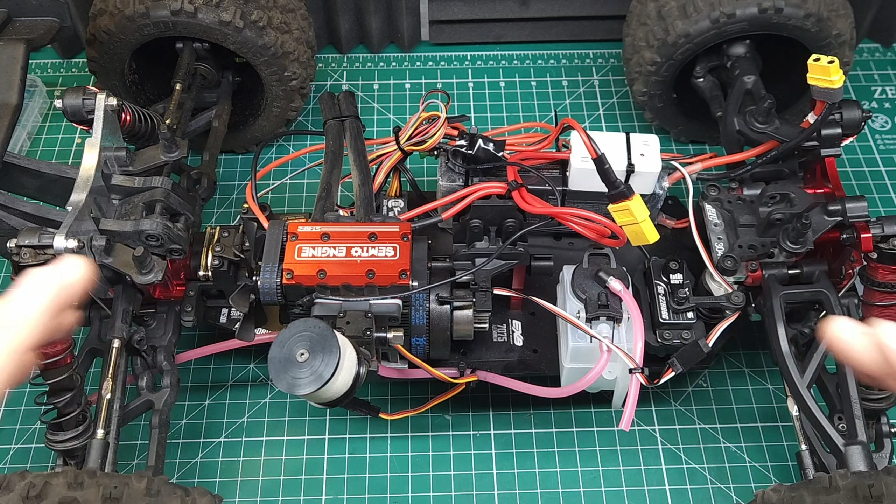In our last video, we engine swapped this Kraton EXB, and while this thing looks absolutely awesome, I think you'll agree the performance of this engine in this particular truck was just a little bit tame. Today, we're gonna make some modifications to this engine that hopefully spice it up, and if that doesn't work, we've got something really spicy to put in.

The last thing we did in the previous video was convert this from nitro to gas. We're gonna be pulling all of this back out of here and converting it back over to glow plug ignition, but first, I'm actually really curious to see how the spark ignition works with nitro fuel. I've read online that this does technically work, and I'm really curious to see what the results are, so let's see what happens. Then when we come back, we're gonna tear this engine apart and fix a few of the deficiencies I found when we built it.

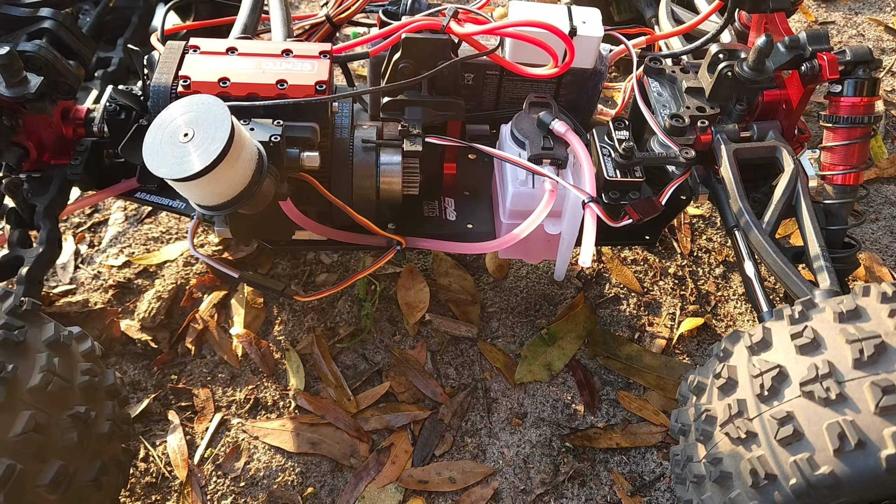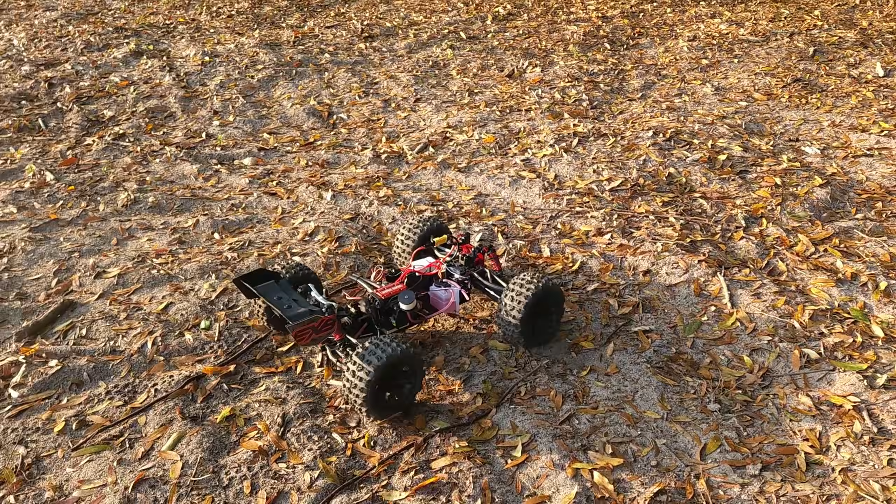All right, she's full of nitro fuel. Let's see what it does. Well, it started awfully easy. Does it run okay? That does actually seem to run better than on the glow plug. It's not any faster though. It definitely is running, that's pretty cool. I'd say it has a lot less power than on the glow plugs though.

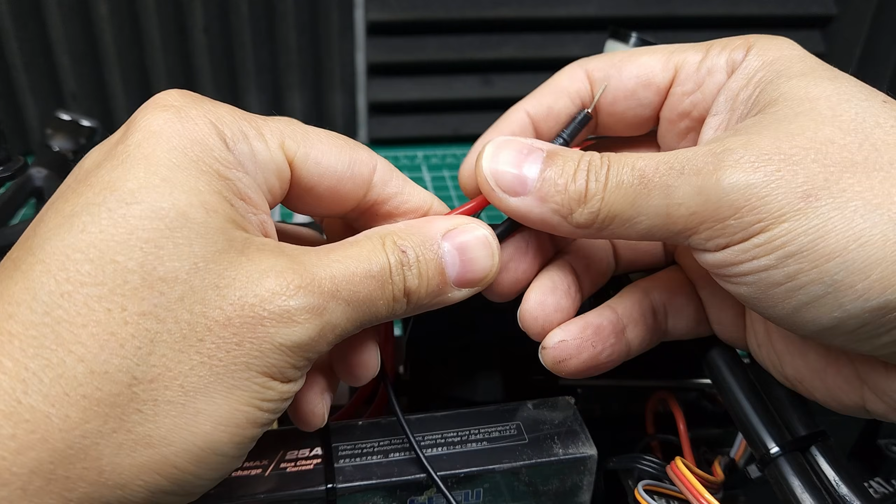What exactly do I mean by that? What's the difference between spark ignition and glow ignition? In any engine, there needs to be a source of ignition in order to turn the potential energy in the fuel into kinetic energy that actually drives whatever you're trying to move. Most gasoline engines use what's known as a spark ignition, where they have a high voltage pulse going through wires through a spark plug, which has a small gap in the end, and that spark is what actually ignites the fuel-air mixture. Most small RC model engines use what are known as glow plugs, and instead of having a spark, you have this filament that stays hot and glows, and that's what ignites the fuel-air mixture.

This is actually a really interesting system. That little wire has a platinum coating on it, and that platinum coating actually catalytically reacts with the methanol in the nitromethane fuel. And unlike the spark of a spark plug, it's that glowing coil that actually lights the fuel off on each combustion cycle. The main benefit to a glow plug system is simplicity. Unlike with a spark-based ignition where you need some kind of high-energy discharge system, a sensor to tell the engine when to actually fire that system, and a bunch of other supporting parts, with a glow plug ignition you pretty much just need the glow plug and then the fuel to actually keep the glow plug glowing.

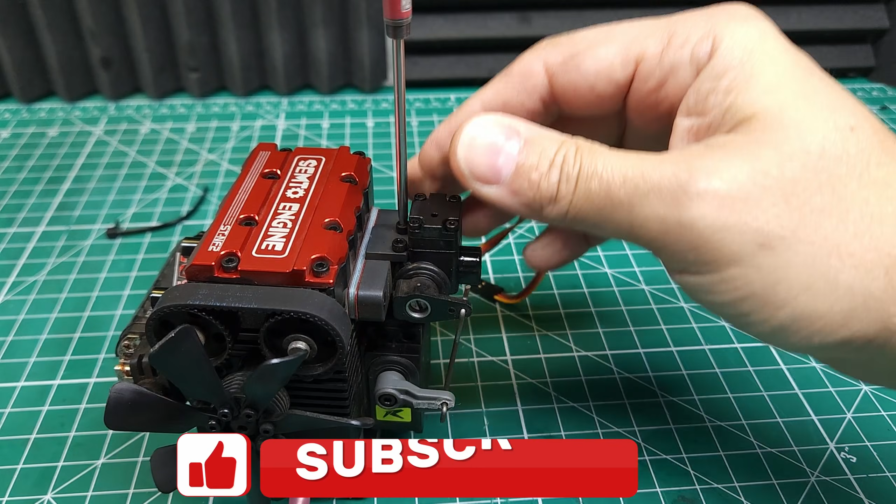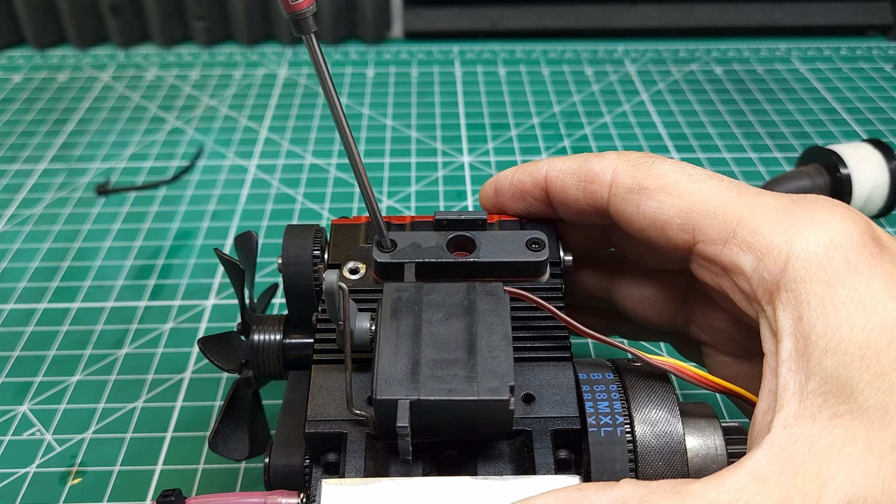The main reason we're going to be switching back from gasoline to nitro fuel is that nitro fuel has the ability to produce a lot more power than gasoline does. This isn't because nitro fuel is more energy dense than gasoline. As a matter of fact, gasoline is a little bit more energy dense by weight than nitromethane is. The main advantage nitromethane has is the ability for it to run a lot more fuel for a given amount of air. The perfect air ratio for gasoline is about 14 parts of air to 1 part of gasoline, and the perfect ratio of nitromethane fuel is about 2 parts air, which makes a huge difference in how much actual fuel you can shove into the engine.

Speaking of shoving fuel into the engine, I think one of the big problems we have is the restriction of this intake manifold. The carburetor lets fuel and air in here. It has to run down to these holes and then into the engine. I think we can make a big improvement here by simply cutting the middle of this spacer and this gasket out. Let me do that and I'll show you what I mean.

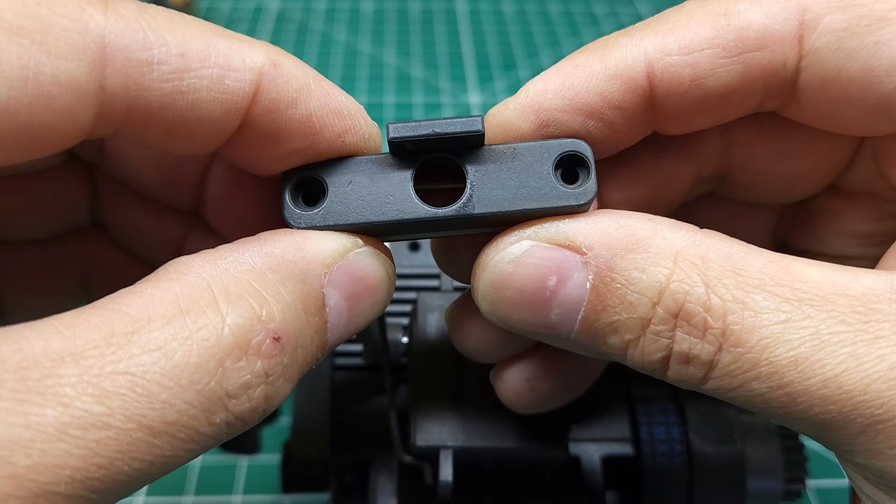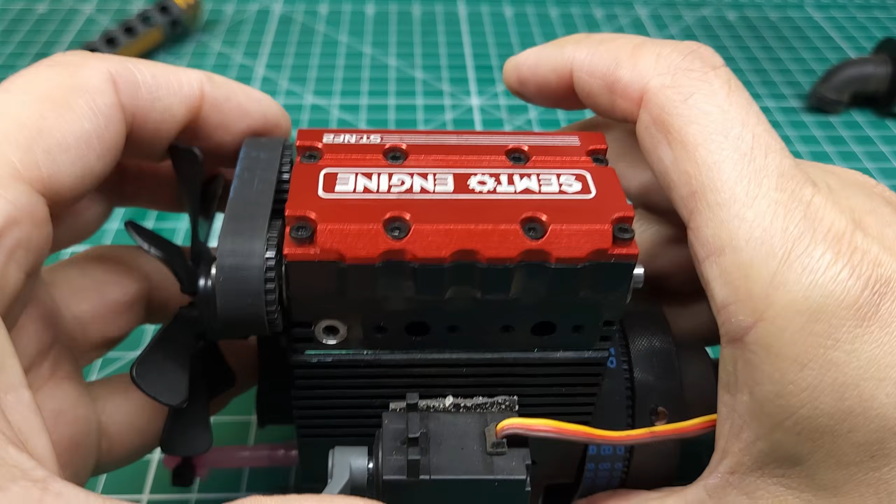As you can see, with that small modification, the actual manifold part of this intake is going to be quite a bit larger, and that should allow a lot more airflow, and I think that's going to give us more power, especially on the top end, but we've got a few other things we can try to hopefully make that even better. I noticed when I was originally building this engine that those valves I showed you didn't really seal that well, and I think if we make that valve interface a little bit better, we can get better compression, which again, should give us more power.

Pulling the engine apart is also going to give us the opportunity to inspect everything and make sure nothing has broken or come loose. Everything in here looks pretty good. As you can see, the top end of the engine is actually lubricated by grease. The bottom end of the engine is lubricated by oil in the fuel, and I think that's another place where we're going to be losing some power. I'll talk about that in just a minute though.

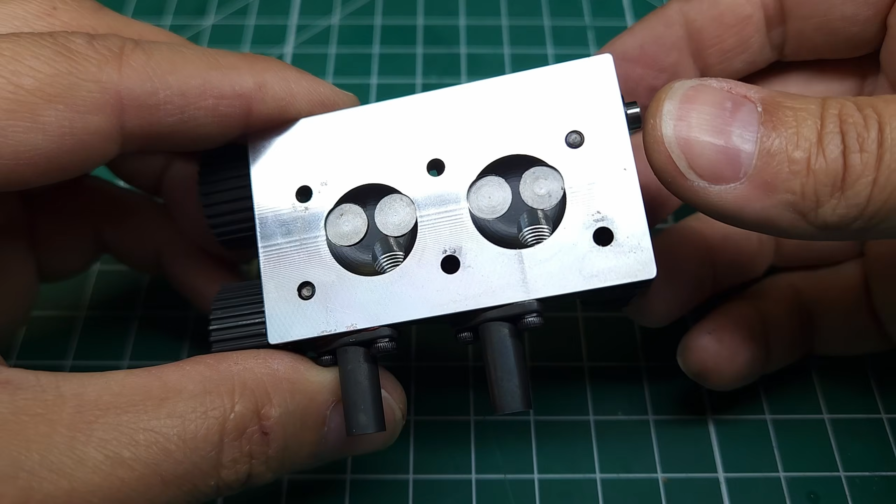In most typical four-stroke engines, valves open and close to allow fresh air and fuel in and combustion gases out. I noticed when I was putting this together that these valves don't seal very well, and I'm hoping that making them seal better will give us higher compression and therefore more power.

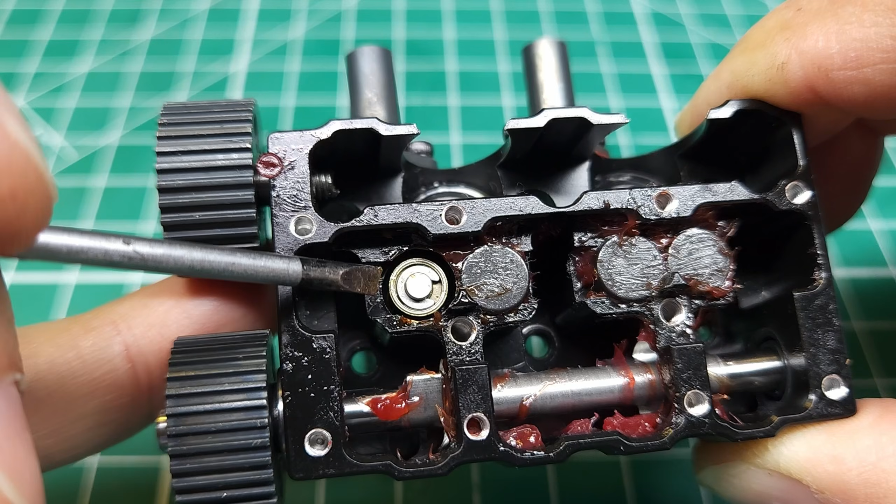Of course, since everything in here is lubricated with grease, everything's super greasy, so we're gonna have to wipe a bunch of this off, but I do think this is gonna be worthwhile, as any combustion gases that leak out not only reduce power, but they also cause problems, especially if you've got combustion gases pushing out of the intake manifold. That can cause all kinds of weird problems. These valves are held in with little circlips, and there are actually springs underneath them. I'm gonna remove this off camera so I don't lose anything.

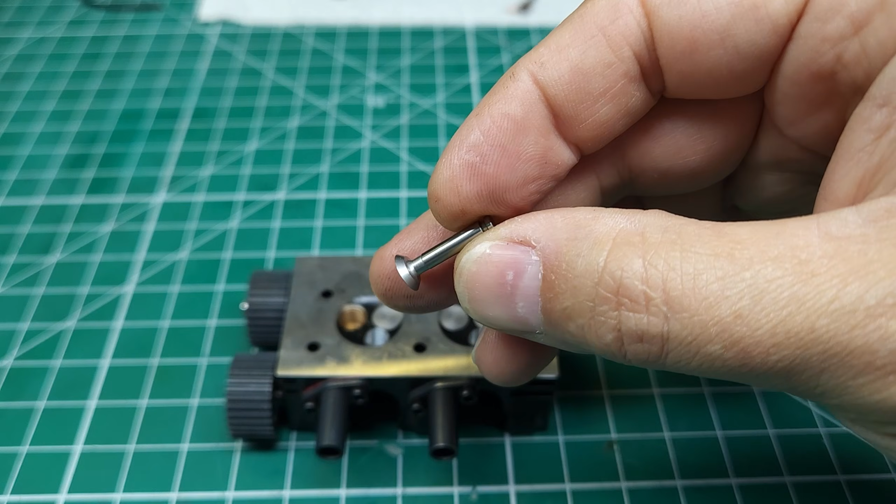Now with that removed, you can see the teeny tiny valve that actually controls inlet and outlet into the combustion chamber. And to lap these valves in, I'm actually going to use toothpaste. Surprisingly, toothpaste does have some abrasive in it, and for something as soft as this brass, it should work just fine. All I'm going to do is put just a little bit of toothpaste on the valve itself, stick it back in the head, nice and minty fresh.

Then I'm going to put a piece of fuel tube on the back. That's going to allow me to spin the valve while pulling on it, and I'm going to keep doing that until we get a really nice mating surface between it and the valve seat. There we go, guys. That actually looks really nice. Now, you obviously wouldn't be able to use toothpaste on a full-size engine because the valve seats are going to be a lot harder, but on something like this, it should be fine.

And again, I'm hoping that's going to give us just a bit more power out of this engine. I'm going to go ahead and get the rest of these done, get all this cleaned up, put fresh grease in it, put it back together, and let's go find out. Okay, guys, we've got more air going in. We've got more air staying in. Can we make more air come out? The answer to that is absolutely, but I'm probably not going to.

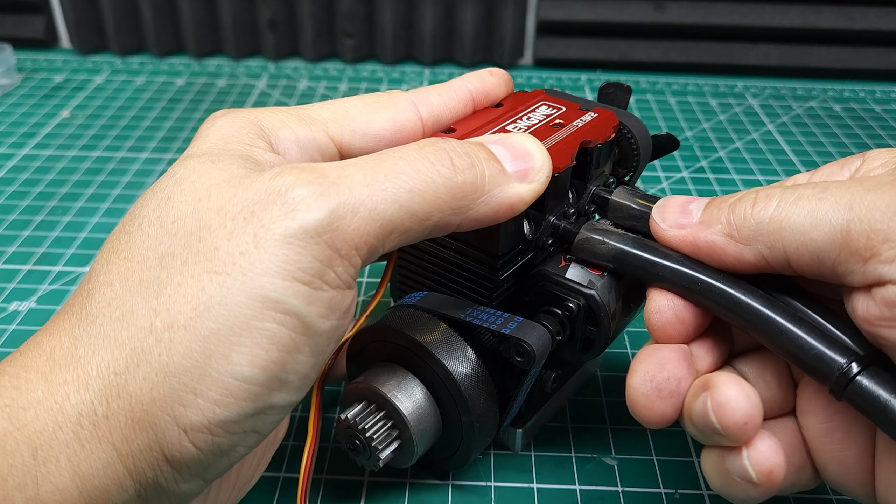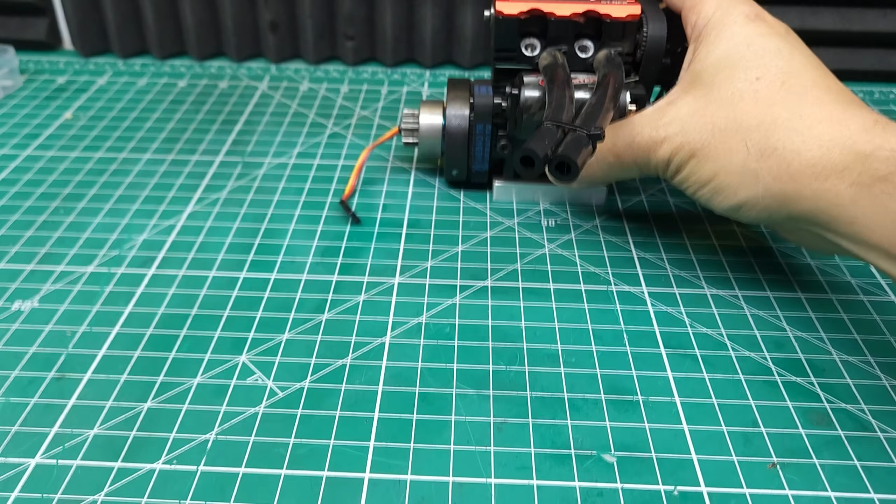I don't think it would make a big difference, but what we could do is make a 2-to-1 exhaust system. And essentially with that, the exhaust pulse from one cylinder will help draw out the exhaust pulse from the other cylinder. In a pretty inefficient engine like this, I really don't think it would make a huge difference, so it's not something I'm going to mess with right now. But if this thing runs great now and we just need a tiny bit more power, it's definitely something we can look at. Of course, if it doesn't and we need a lot more power, we're going to be looking at this.

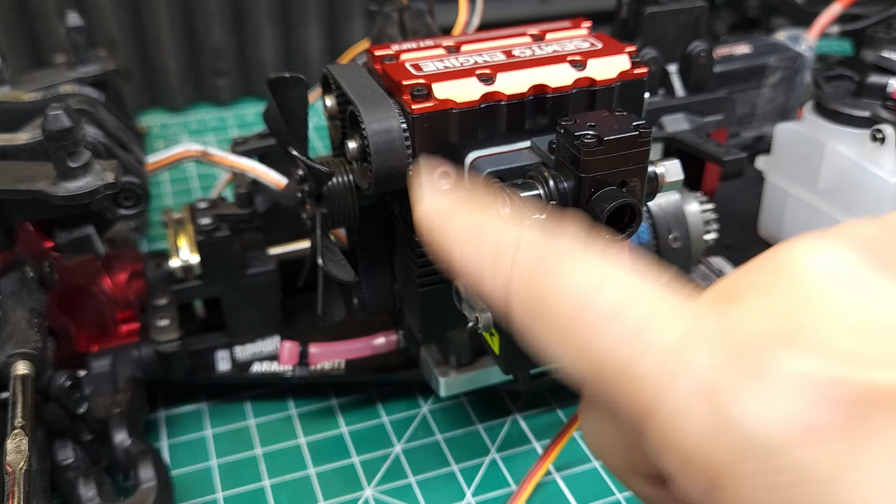One of the reasons I think we see a big loss of efficiency is the design of the lower lubricating system. The design of this engine means it depends on oil from the fuel to lubricate everything in the bottom end, which means by design, this thing relies on compression blow-by, and compression blow-by means less power. Unfortunately, there's nothing we can do about that because the bottom end does need to be lubricated. Now, speaking of power, let's go ahead and get this thing filled up with fuel and see if we can make any more.

Yeah, I actually think they did. This thing sounds meaner, and it's actually got more power. I'm kind of surprised. I didn't think it was going to make much difference. Of course, it's still not super powerful, but it's definitely more powerful than it was. I'm very impressed. Yeah, it's definitely running better, and the exhaust sounds so much louder than it did before.

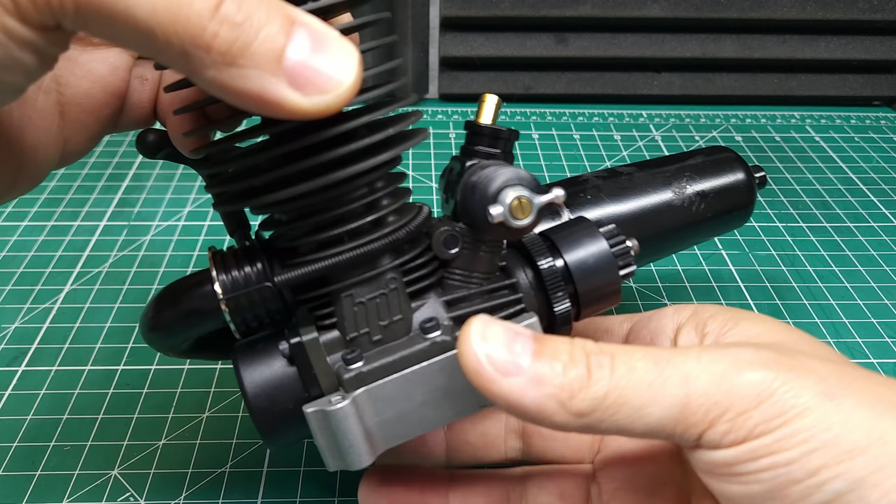Obviously, this is not the performance we're looking for, though, so let's find that performance. And for that performance, we're going to turn to this HPI F4.6 Nitro 2-stroke engine. This thing's actually a little bit smaller displacement than the engine we had in the truck, but this is a 2-stroke engine, which means we're going to get double the combustion events, and this thing is specifically designed to power a big, heavy RC car. I think we're going to get some good performance out of this thing.

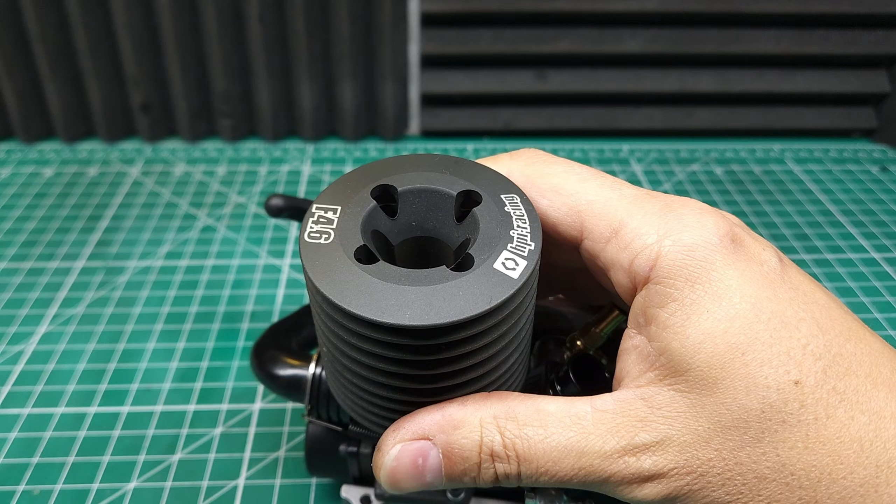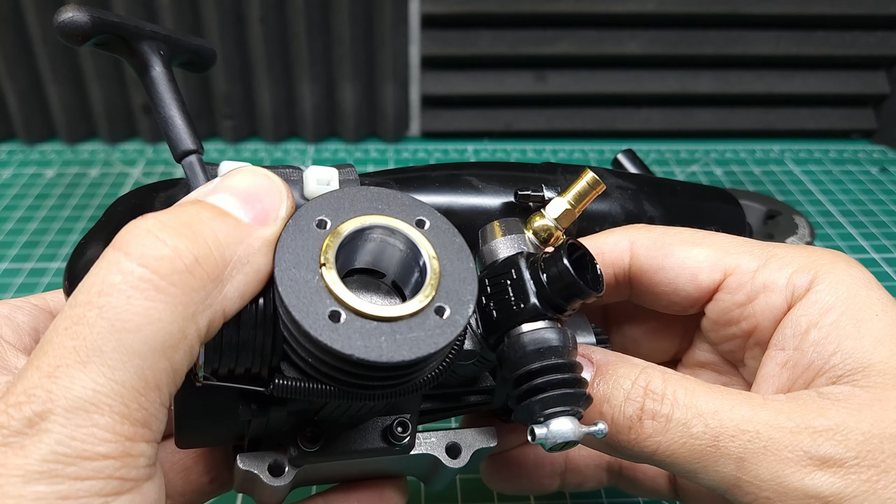The way most 2-stroke engines work is pretty fundamentally different from how a 4-stroke engine works. Let me get this cylinder head taken off, and I'll show you what the differences are. Now, as you can see here, there are no valves on the cylinder head, and there are no real valves at all in this engine. Instead, if you look down there, you can see there's a set of ports on both sides, and those ports are covered and uncovered by the piston, and that's what lets fresh air in and exhaust out. On a 2-stroke engine, the intake and compression cycles and the combustion and exhaust cycles are actually combined, which is why you can get a combustion event every single time the piston goes up.

Unlike most 4-stroke engines, these small 2-stroke engines also don't have a piston ring that seals the piston against the cylinder. The cylinder actually tapers up here at the top, and you can see the piston pushes against it and actually pushes it out at the top. That's because this engine's brand new, which means we're gonna have to break this in, but first we need to get it in the truck.

I'm hoping if we flip this exhaust around, we can put it where the other engine was so we can use the same slots I already made in the chassis in the previous video. In order to do that, we're gonna have to be able to use this motor mount. Let me go ahead and take some measurements off this new engine. We'll go ahead and put those into CAD and see just exactly what we'll have to do to the original motor mount in order to make it work.

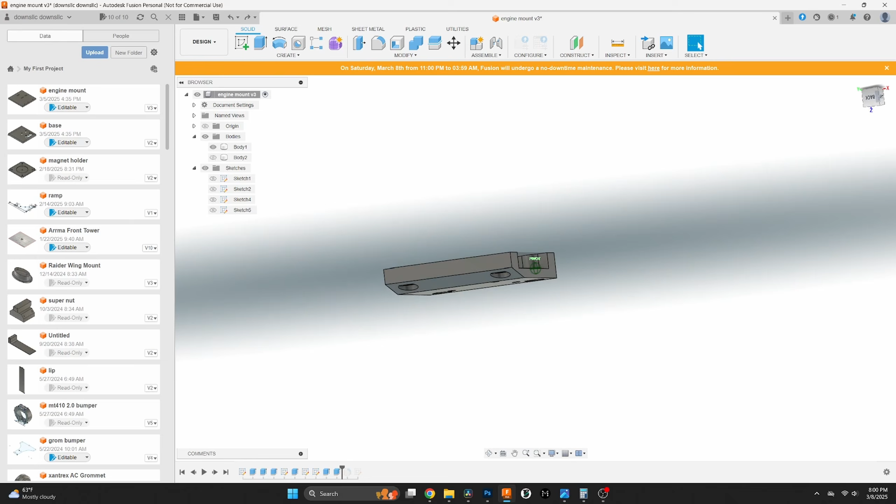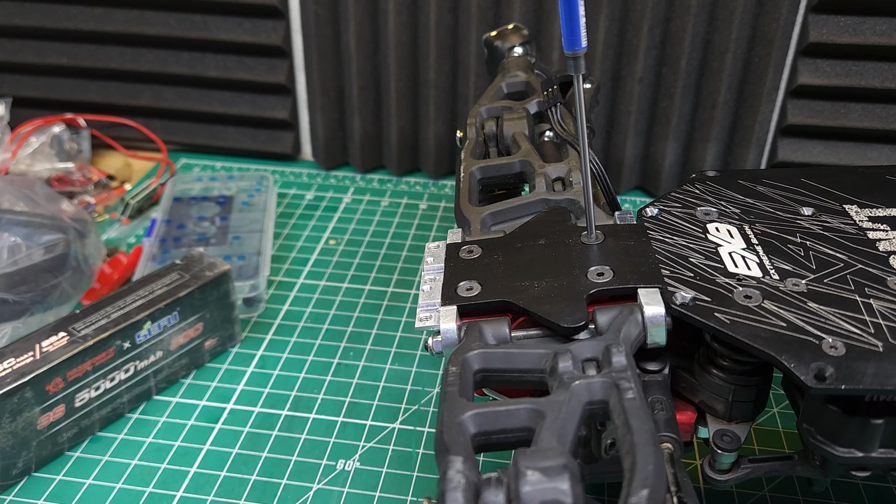And as you can see here, we'd have to cut a big notch in the mount, which I don't think is a great idea, as it's going to make it pretty weak and our screws are going to have to be really short. So unfortunately, I don't think mounting it on this side is going to work, which means we're going to have to mount it over here, which means we got to strip this whole thing back down again. And now with all that stripped down, let's see if this thing's even gonna fit. It does look like it should mesh up with the center differential, and I think there's even gonna be clearance for the rear drive shaft, so yeah, I think we're in business.

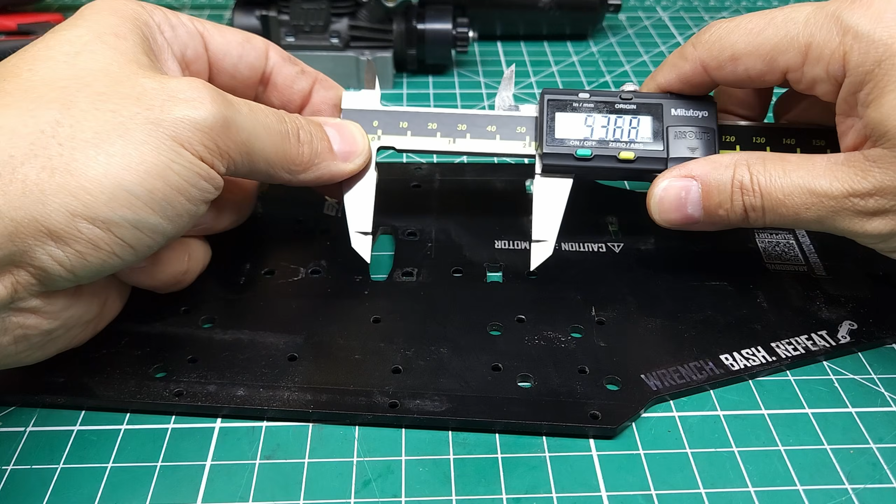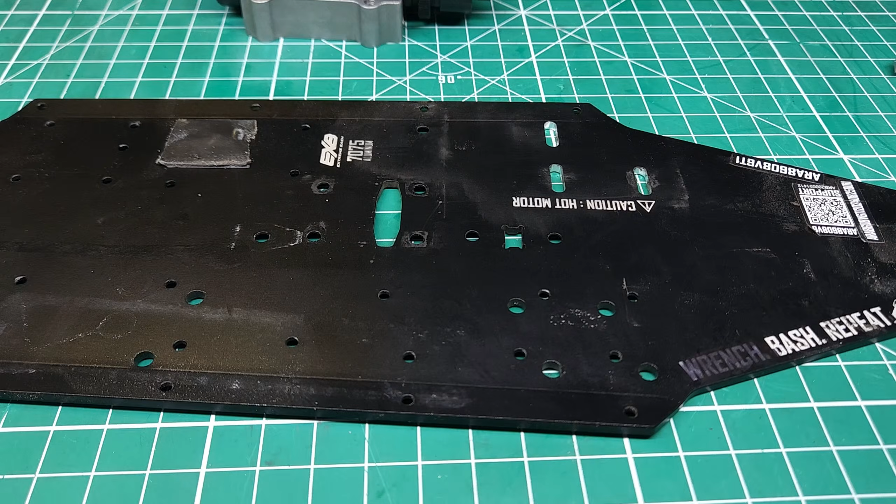Again, we just need to take some measurements on this chassis, and then using the measurements I've already taken on the motor mount, go into CAD, take our model of the chassis, add the holes in where they're supposed to be, make those into slots, and then we can switch our Snapmaker Artisan over to laser cutting mode, cut this out in paper, and about 10 seconds later, we can actually test and see how it's gonna fit.

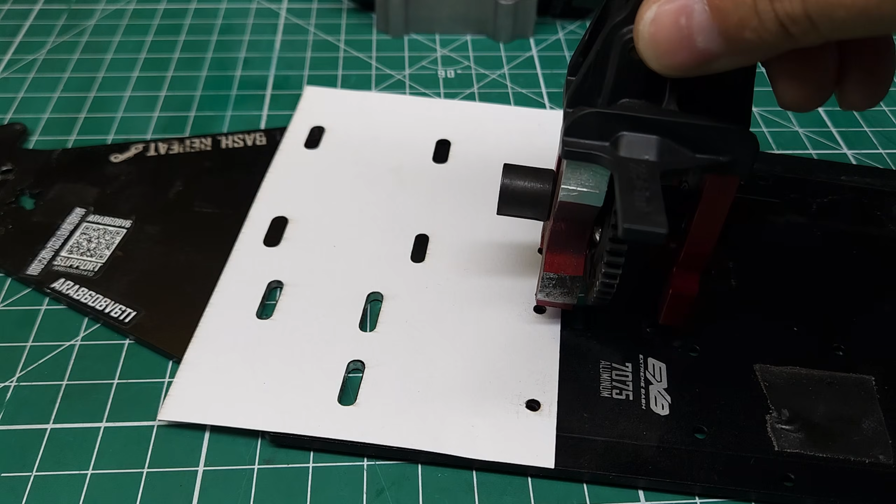This is where our new slots will go, and fitting the motor over the top, it looks like it's going to be pretty close, though I think I need to scooch these slots over a little bit. So let me fix that in CAD, cut it out again, and we've got a paper template one more time. I'm telling you guys, that's the beauty of this laser cutter. You can iterate in prototyping so quickly. Putting this on here and dropping our center differential on, and then our motor. It looks like all this stuff's going to line up just about perfectly.

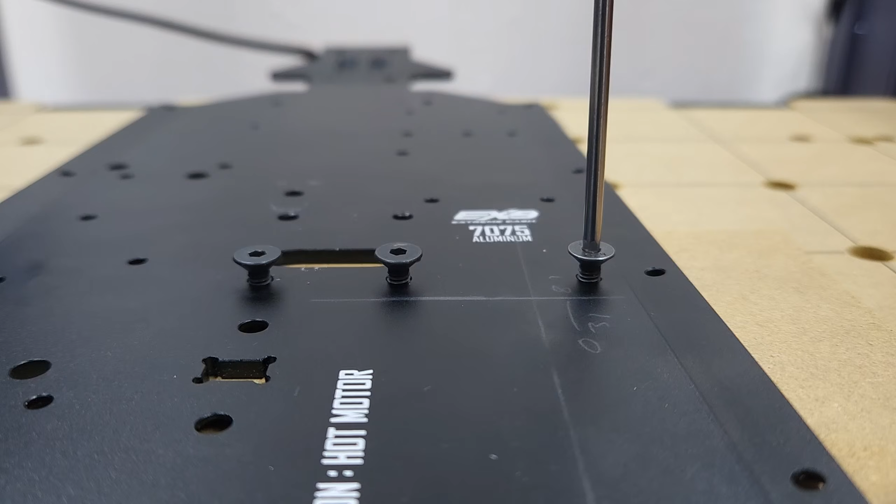And because there aren't very many square frames of reference on this chassis, we're going to use the exact same trick we did last time, where we're going to drill 3 holes that match the holes for the motor mount. Then we're going to screw the chassis down onto those holes which align it, and then we're going to go ahead and cut our slots. This chassis is starting to look like Swiss cheese, but these holes came out really, really well, and they're exactly where I wanted them to be.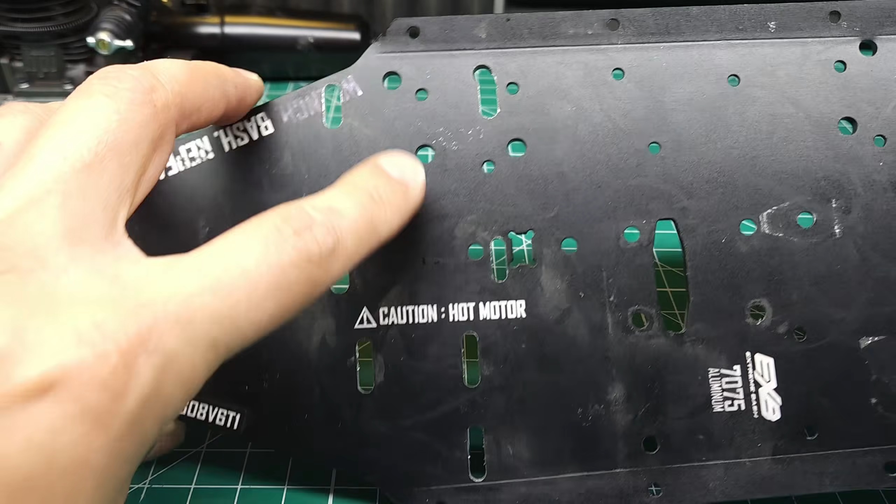Kind of had to thread the needle here. I'm actually going to use a smaller screw and put a nut on the other side here, because if I'd made the slot the same size as these, it would have ended up either in this hole or in here. But now let's get this center differential on here and see if it actually fits.

Not only does it fit, but those gears line up absolutely perfectly. Guys, I think this is actually gonna work. Let me get the throttle servo installed and do some wiring, and I'll show you what it looks like.

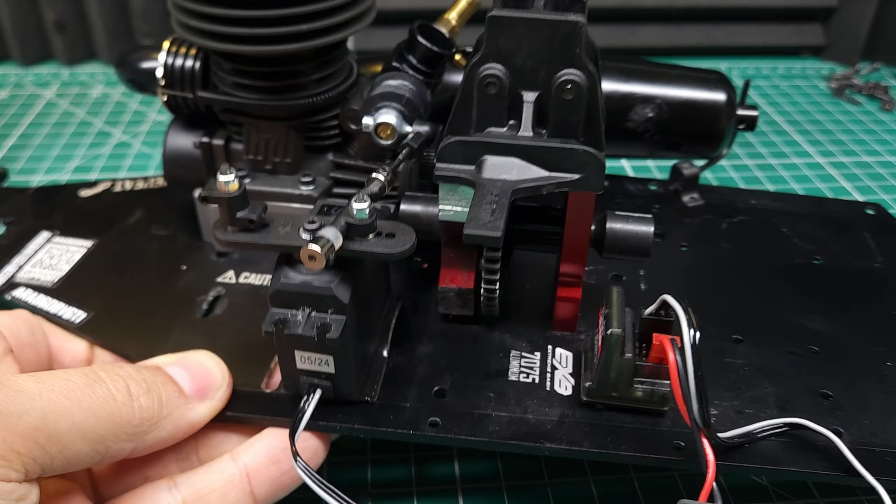Now, you might laugh at the fact that I double-side taped this throttle servo to the chassis, but they didn't call this kind of tape servo tape for nothing back in the day. A lot of servos used to be taped onto chassis, and especially for something like a throttle servo where there isn't really a lot of stress on it, this is gonna hold up just fine.

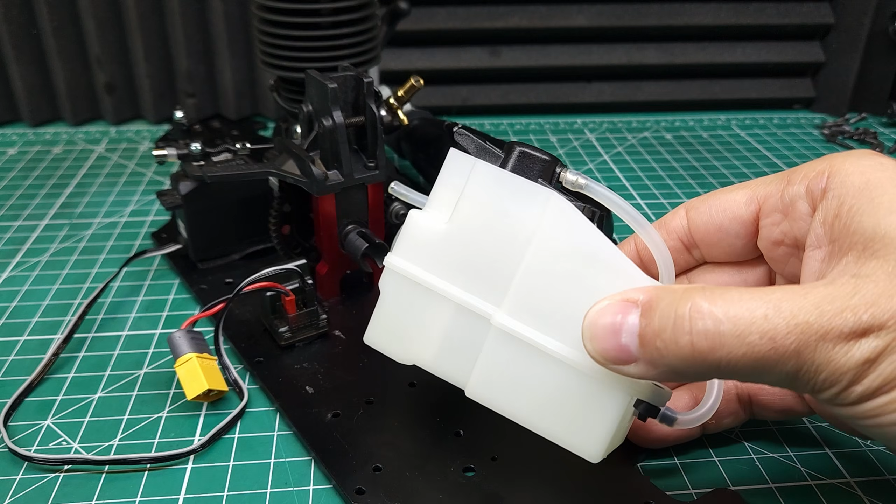I've also installed and wired up my receiver, and if we plug this in, you can see we've got throttle control now. Of course, controlling the fueling only works if we have fuel, and I think I'm going to use this fuel tank. The tank we were using before was really small, and I don't think we're going to get much runtime out of it. I think this will fit right here, and yeah, that should clear the front drive shaft.

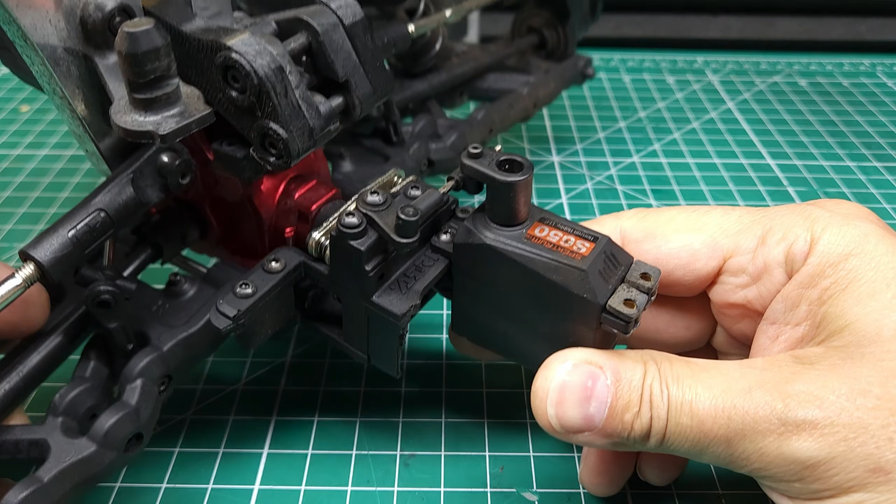Now we just need to get the front and rear ends installed, and looks like we've got a clearance problem. In the previous video, I had to customize the mount for this rear brake servo because the engine was over here. Well, now the engine's over here, and it's in the way again. Unfortunately, I cut the mount off this side, so we're going to have to move this a different way.

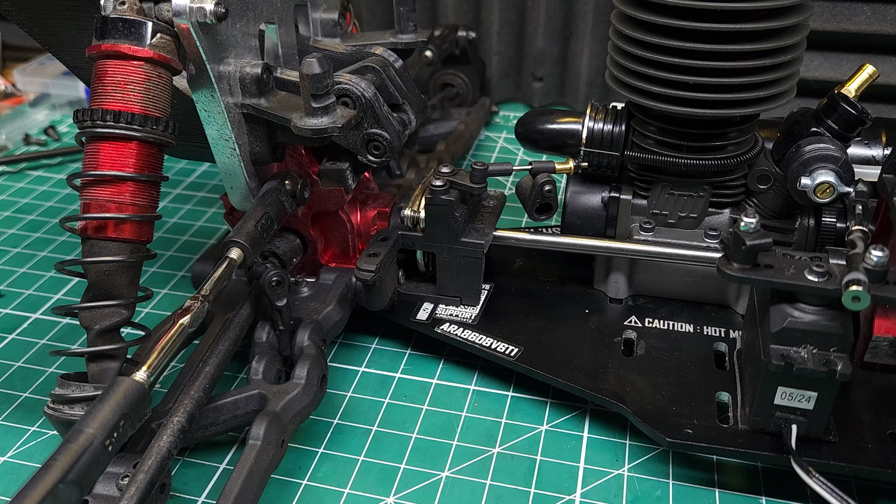If you've never seen one of these before, it's a mechanical brake. When you engage the servo, it squeezes these 2 pads together and stops this rotor from spinning. The rotor is attached to the input, and that's what's going to give us our brakes. Well, fortunately, even though I did cut that bracket off, these 2 screw holes are still here. I think it's going to be plenty to hold this servo in, and that's going to clear everything just fine.

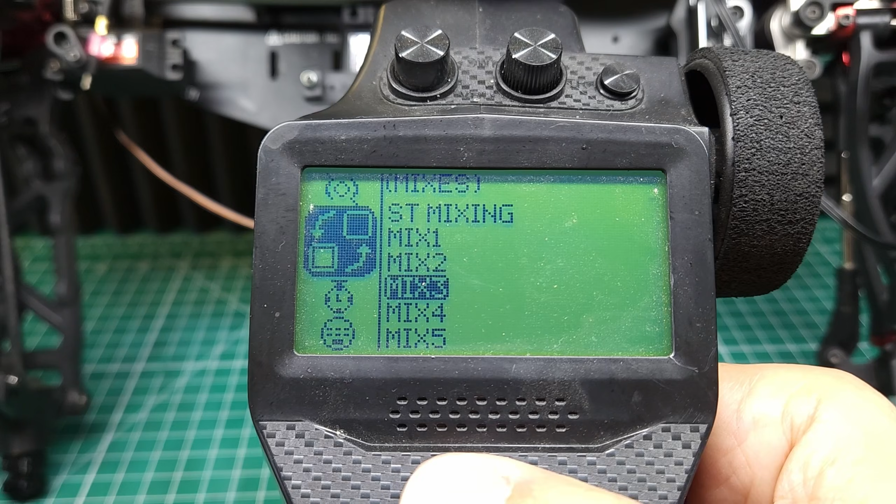All right, now we have throttle on one servo and brakes on the other servo. Some of you were wondering how I set this up, and on the G7P, it's fairly straightforward. Basically, I just set up a couple of mixes to where on channel 3, when I give it throttle, nothing happens, but when I give it brake, it activates that channel. You can see the M and S down here at the bottom. I'm getting the brake right now, and it's activating that channel. I'm hitting the throttle, and it's not doing anything.

But then on mix 2, I have it set up to where if I give it throttle, I get that out on channel 4, but if I hit brake, nothing happens.

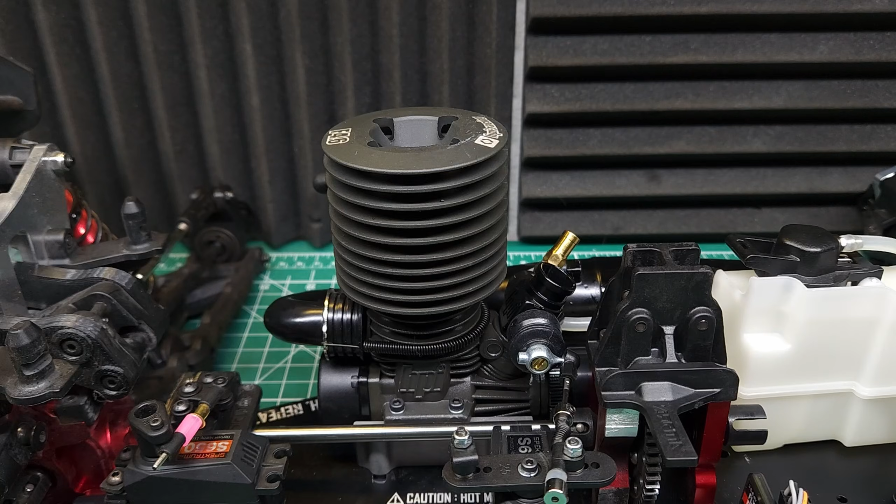I also did leave the front drive shaft out. I'm really curious to see how this thing handles 2-wheel drive. We'll probably end up putting it back in, assuming we have enough power out of the Nitro engine, but for now, I want to see what it can do with some slides, skids, and burnouts. Before we do that, of course, we need to break this brand new Nitro engine in.

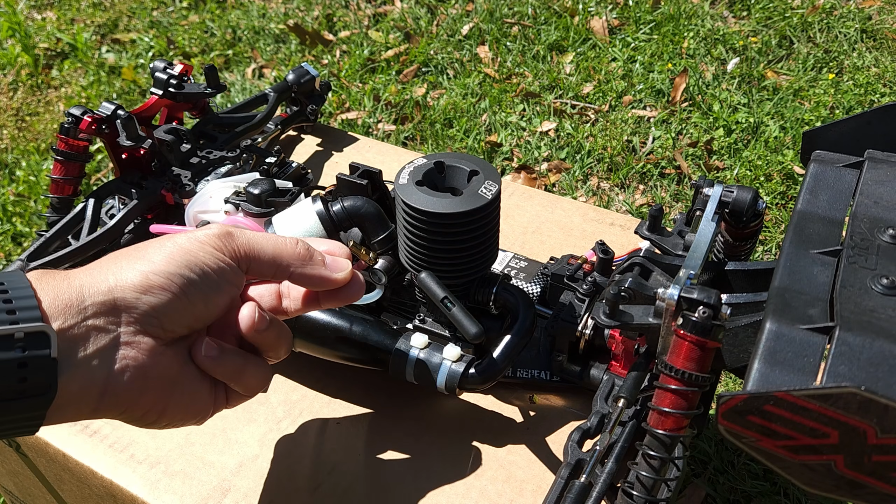Now, there are about as many different Nitro break-in methods as there are Nitro engines, and there's a really good reason for that. There is no one single best way to break in a Nitro engine. The ultimate goal is just to keep the engine at a consistent temperature and well lubricated while the initial break-in occurs. And how long that break-in is going to take really depends on the engine, manufacturing tolerances, and a bunch of other things.

What I like to do is just heat up the engine, get it started, idle it for a few tanks, letting it cool down between tanks, and then take it easy on the first couple tanks that you're driving it, and then go have fun. I'm going to be preheating with a heat gun, but you could use a hairdryer. It works just as well.

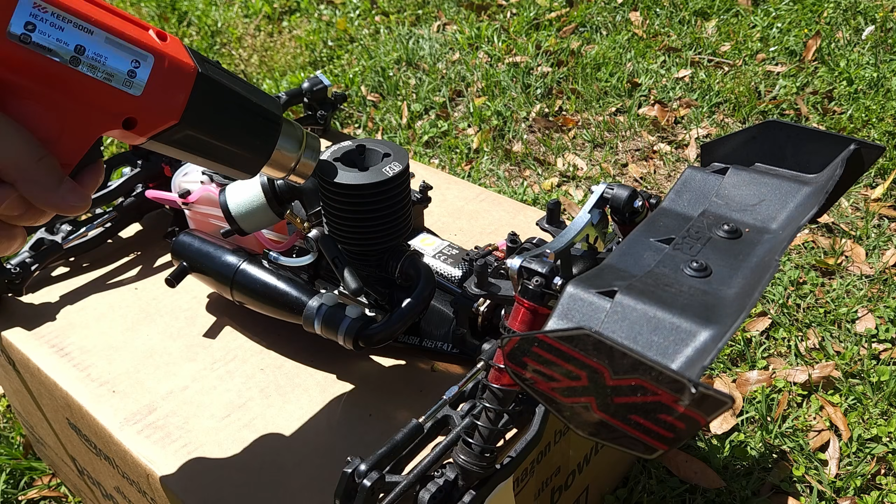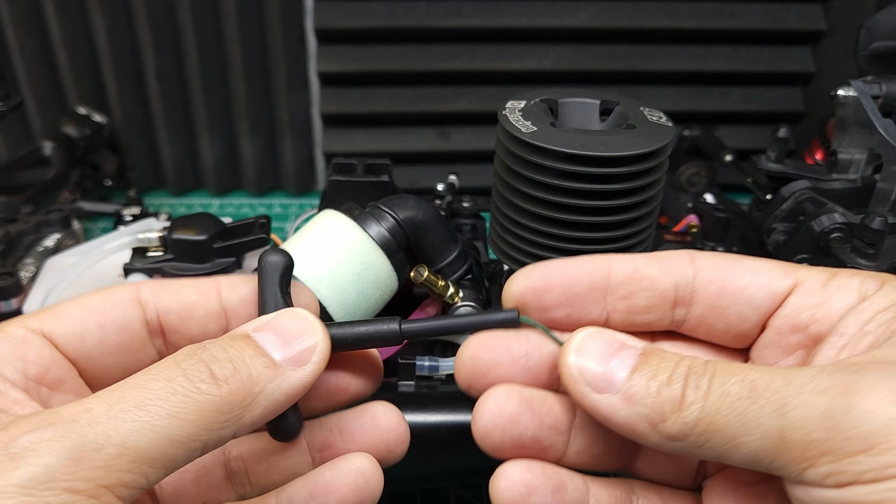And then once it's started, we're going to use an infrared thermometer to make sure it stays around 200 degrees Fahrenheit. Speaking of which, let's get this thing cranked up. Uh-oh. Well, that was unexpected. Unfortunately, this pull starter is actually broken. Now, I could take this apart and fix it, but I really don't want to, and I don't have a replacement pull starter. What I do have is a whole nother brand new engine.

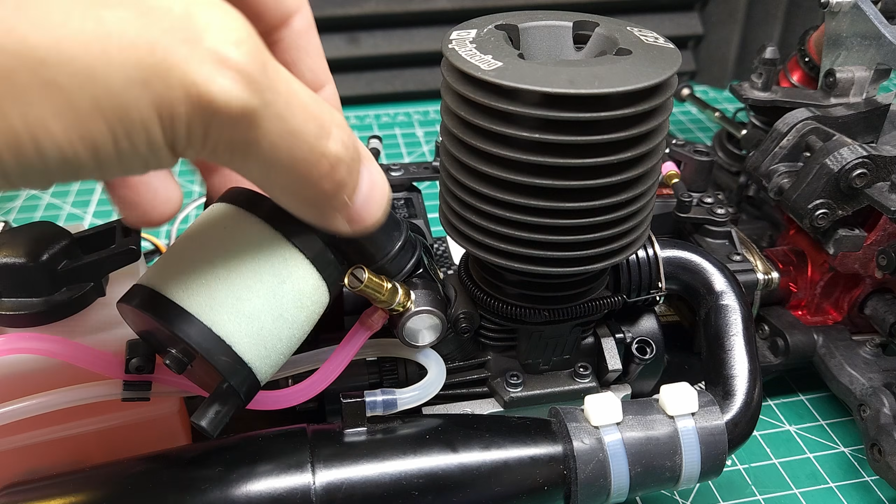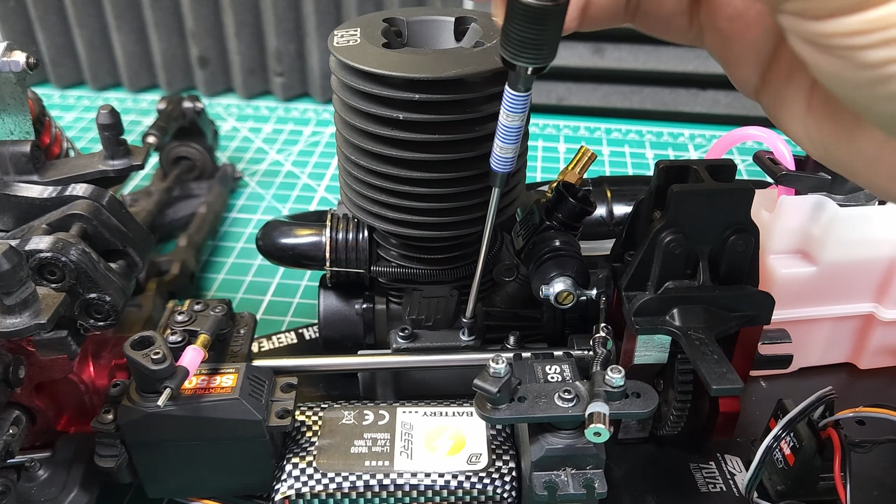The good thing is swapping out these engines is actually very straightforward. There's not really much holding them in the car, and once I get that linkage removed, it's really just 4 screws, and we can go ahead and swap this over. Obviously, having the privilege of a whole spare engine means I don't have to go through the hassle of re-threading that pull starter, but of course, in most cases, that's probably what you would do. But I'm on a tight schedule, and that other engine is pretty much going to be the same thing as this one. They're about the same size and should make about the same power.

Speaking of which, I don't know if I mentioned it, but these engines are rated to make about 3 horsepower, and that little 2-cylinder Semto engine that we had was rated at about a half a horsepower. So assuming we can get this to work properly, we're going to have about 6 times the power we had before. And now this should just pull right up out of here. We're going to need to swap over the exhaust. That's just held on by a spring.

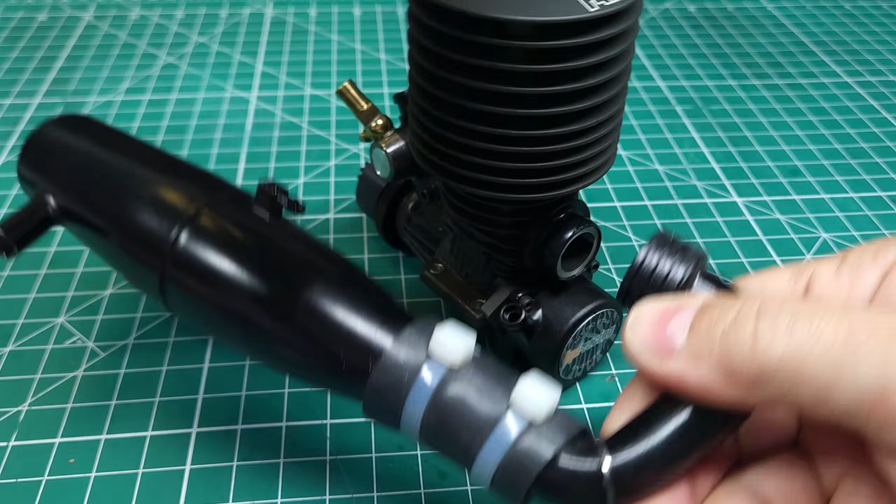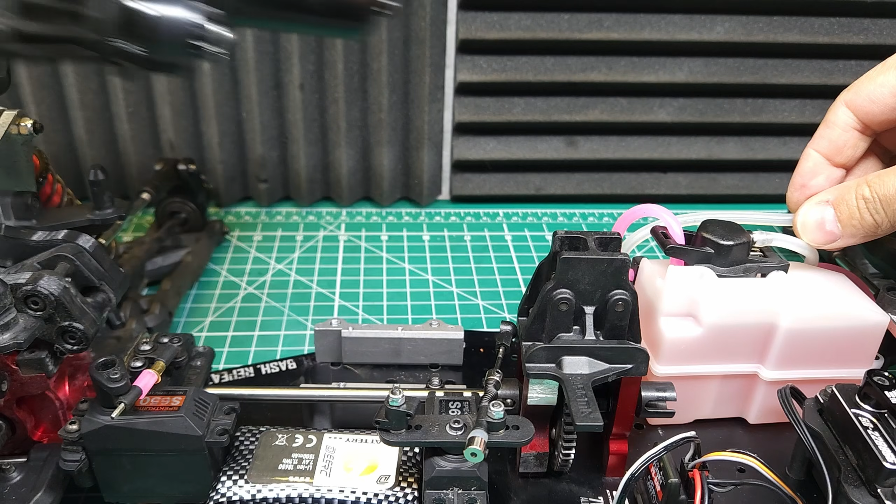And we'll need to swap over this clutch, which should be fairly easy to take off, though they can be a little ornery sometimes. We'll see how this one goes. Well, fortunately, this one just fell right off, so this is a lot easier than it is sometimes to get these apart. And now we just need to install everything back on the new engine. And now finally stick the new engine back in the car, and I'll see you outside. All right, let's get this thing preheated and see if it'll start.

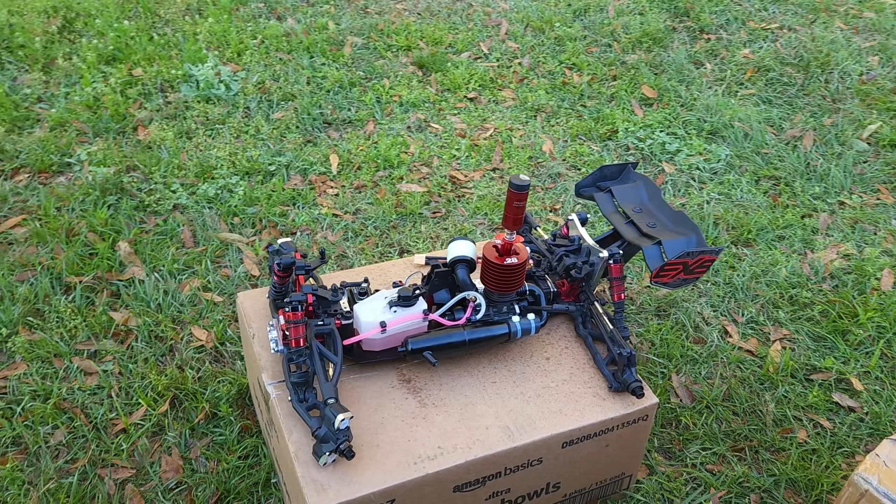We got the first couple tanks done on the bench. Let's see how this thing's gonna do on the ground. Remember, this thing's really, really rich, and I'm only gonna be going about a quarter throttle. Oh, okay, this has got so much more power than it had before. Like I said, this is just barely getting on it, and it's still way rich during break-in, and it's already kind of uncontrollable. So yeah, we're definitely gonna have to make this thing four-wheel drive.

Know what we want to see, and that's that gorgeous red nitro head sticking out of the back of this Kraton EXB V6 body. Let's get to cutting. First things first, I'm just going to go ahead and cut a slit for the exhaust. Obviously, cutting up a beautiful body like this isn't for the faint of heart, but it's necessary for this project, so we're going to do it. And there we go, that's a good start, that looks awesome, but now of course comes the hard part, cutting the hole for the actual engine itself.

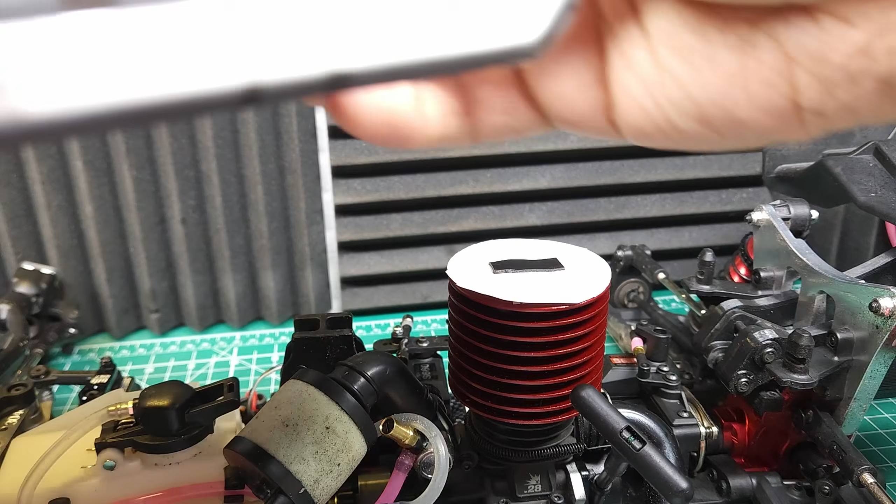What I'm going to do to make sure I get this in the right place is just take a tracing of the outside of the engine head. Now I'm going to cut that out. That's close enough. Now I'm going to take a piece of this double-sided tape, stick it to the paper, take the backing off, and then just lay it on top of the head pretty well centered. And now I'm going to put the body on top exactly where it's supposed to go. Now when I pull that back off again, the paper is stuck to the body and I know exactly where I need to cut to fit the engine.

I'm going to go ahead and finish tracing this out and make the cut off camera. So let me do that and I'll bring you back and show you what it looks like. And there we go, guys. And now we just need to convert this thing over to four-wheel drive. I already put the front CVDs in, so we just need to put the front drive shaft in, which hopefully is going to clear this gas tank, and then we should be good to go.

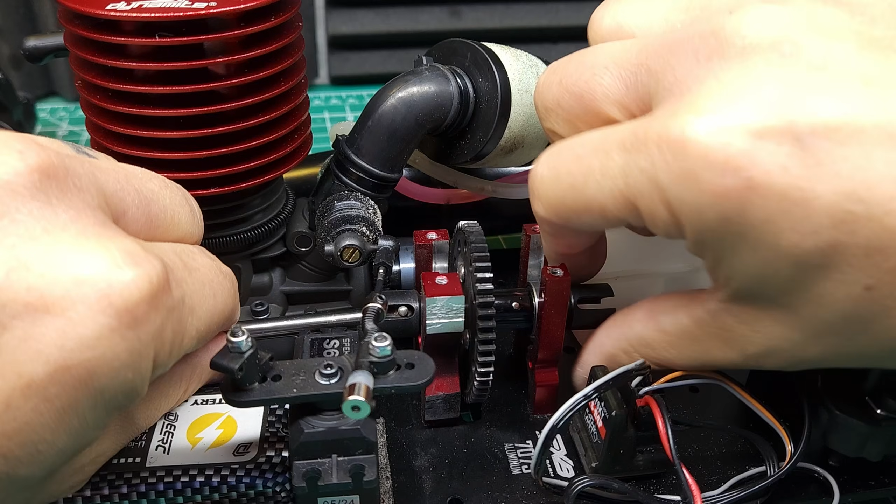Instead of having a center differential in this truck, we just have a center spool. This was necessary in two-wheel drive so that we didn't lose all the energy through the front open part of the differential, and it's going to be necessary in four-wheel drive so that the brakes work in both the rear and in the front. There we go, that should give us a lot more traction to handle 6 times the power of that old engine.

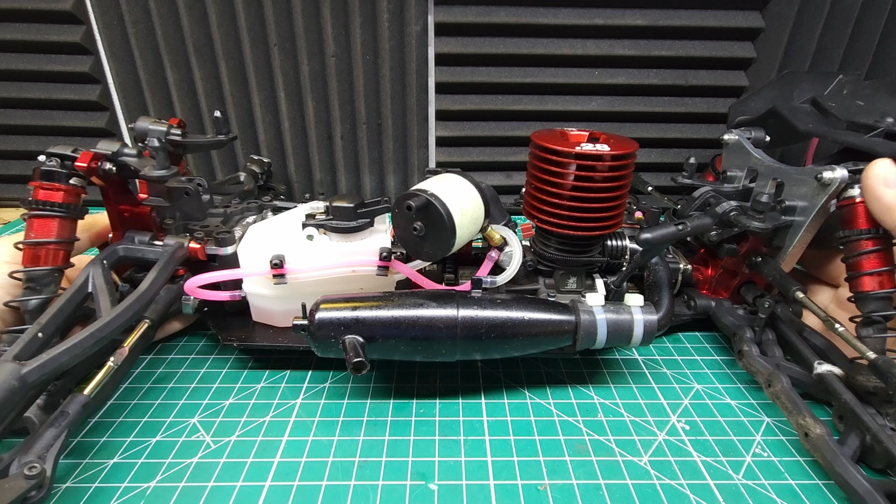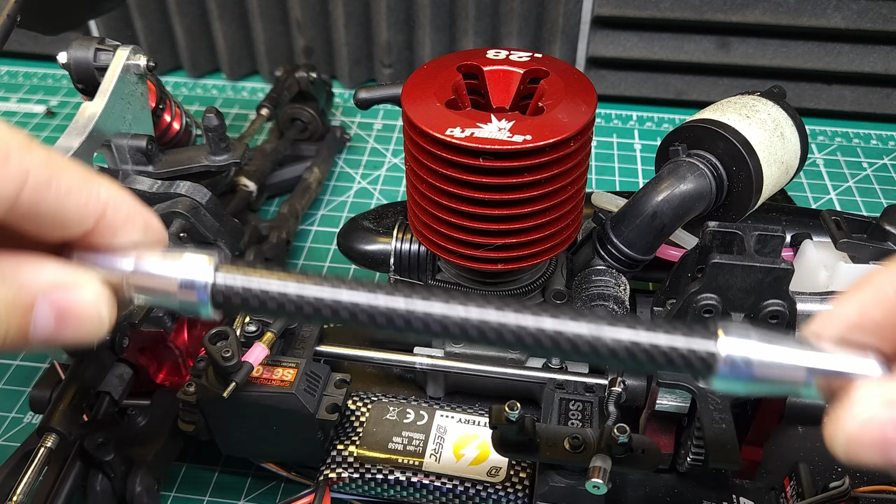Now we need to address one more thing before we take this out for a blast. I noticed without any of the support, this chassis is very floppy. Unfortunately, we don't have room for the tower to chassis braces in the rear or in the front, but we should be able to do the tower to tower braces with just a little bit of modification. The front one installs no problem, everything clears, but unfortunately the rear one interferes with the cooling head on the engine. I think we can get around this just by mounting it to the outside of the middle here.

Obviously the best solution would be to mill some of the cooling fins off the engine, but that's going to reduce cooling and I really don't want to do that, so let's see if this works first. Yeah, I think this is going to work, and whereas this probably isn't quite as strong as it was originally, it certainly prevents the chassis from feeling completely floppy and should prevent these gears from stripping out when we land a jump, which hopefully we're going to go do right now.

Alright guys, let's see what she can do. Now keep in mind, I'm still running the break-in process on this, so it's very rich, but as you can see, we have got plenty of power now. This thing is a lot of fun already. Yeah guys, this is what a Nitro RC car is supposed to be like. And this thing has a ton of jam.

Obviously, again, this is not going to be as powerful as something like a modern brushless system. You're just never going to get that out of a Nitro engine. But as you can see, it's plenty powerful enough. And this easily feels like 6 times as much power as we had before, which is what they said it was going to be, so I'm not surprised. Yeah, this is fun.

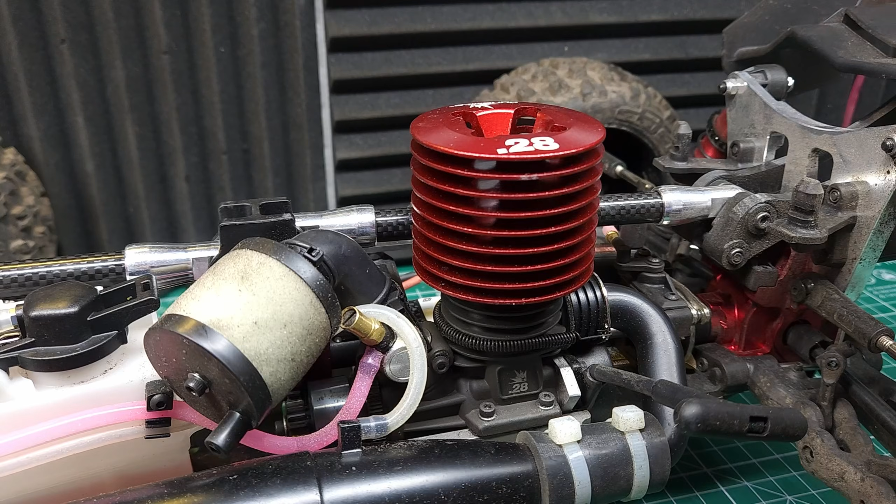So there we go, guys. I think that sufficiently scratches the Nitro power itch. And like I said out there, this engine is just barely getting broken in. It's still being run really rich. We probably have another 30% power available once it's fully broken in. These brakes actually worked better than I expected them to. And even though we don't have a center differential in here, the thing handled just fine.